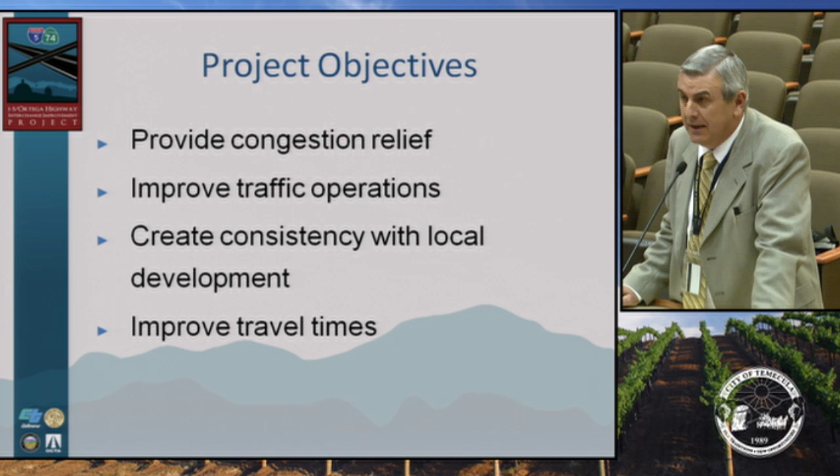The project objectives are congestion relief and traffic operations improvement. We're doing a lot of context-sensitive design. I know that you're very sensitive to those issues in this city, as you can tell by looking at your wonderful city complex. So that's part of our bridge design, to make sure we incorporate that so it fits well within the city, and to improve travel times.

The project funding is as you see, a total of $86 million from various sources.

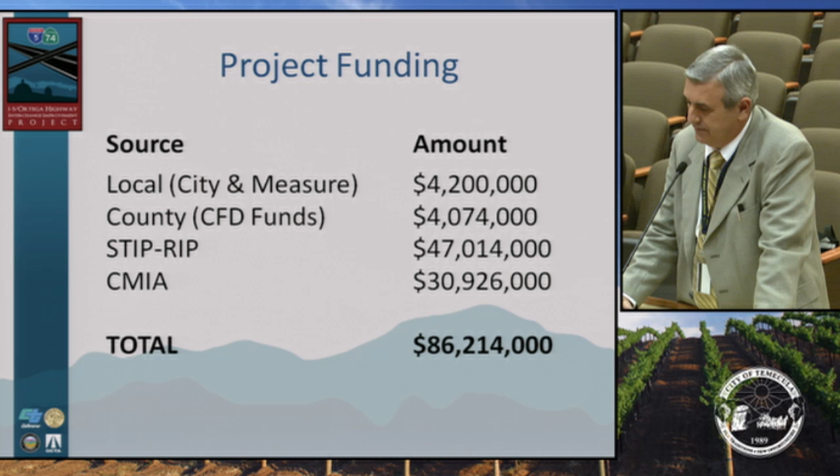Here's the construction schedule. We advertised June 4th, 2012. We opened the bid August 2nd. Obviously a project of this size has a little bit of vetting for the contractor to make sure they can perform the contract, so construction actually started on the 19th. The 15th was a 3-day presidential weekend, so the first day of construction was midnight of the following Monday. The project completion will be in 2015, and the plant establishment period is basically a warranty for plants, to make sure the plants take when they're planted and thrive well. But there's no construction going on during that establishment period.

This is the current interchange as it exists today. There are some issues with the interchange that cause traffic to back up into town. The biggest one being that if you're coming out of downtown San Juan Capistrano and want to go north, you have to make a left turn at the light on the bridge, which stops all the westbound 74 traffic. So there are signalization issues that result from that kind of back-up traffic into town.

The other issue is that with the increase in traffic, we have a lot of cars exiting at the 74, and the amount of traffic load means we're storing cars on the freeway. So you have cars backed up while cars still on the main line are doing full speed, passing cars that are essentially stopped right next to them in the lane. So for safety issues and operational improvements, we do need to rebuild the entire interchange.

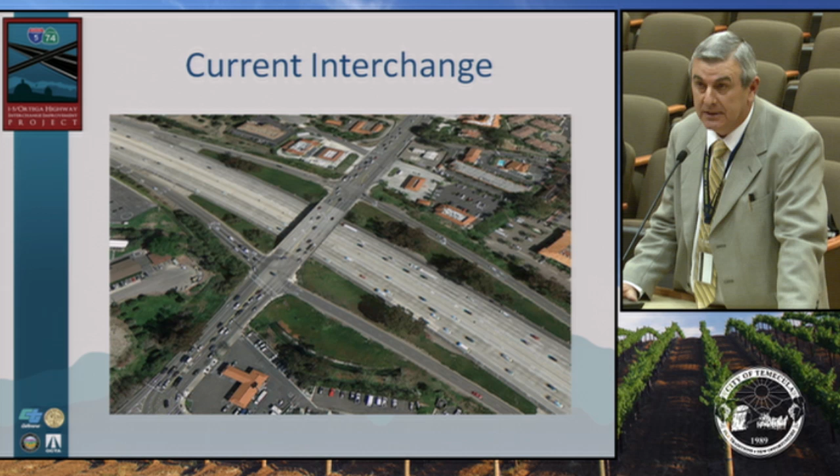So this is the project scope. We're going to be widening the southbound off-ramp at the terminus of the bridge to provide more car storage, and we're providing an aux lane on the southbound that will help solve some of that car storage problem on the main line.

We're going to totally change the alignment of the west side of the bridge. Rather than it go down to the Mission, it's going to turn and curve into Del Obispo Street. There was a significant amount of right-of-way acquisition required to accommodate that.

Out of all the build alternatives for this bridge, the city worked with us extensively during this process, because this project actually started in 2000. The original PSR was in 2000, and the build alternatives came out in 2009. Out of the 3 final vetted possibilities, the city chose this one. As a result, for those of you familiar with the area, the Jack in the Box was acquired, both Chevrons were acquired, the Arby's was acquired, and the Union 76 is also gone.

In addition, the biggest operational improvement will be on the east side of the bridge—you can see that loop on-ramp. Now, instead of having to do left turns on top of the bridge and stop westbound traffic, drivers will be able to do a nonstop right turn into the loop on-ramp, and that ramp has enough storage to carry the platoon of cars that comes off the bridge when the signals change. So when the ramp metering is enabled, we should not have a situation where cars back up on the bridge and stop that westbound traffic.

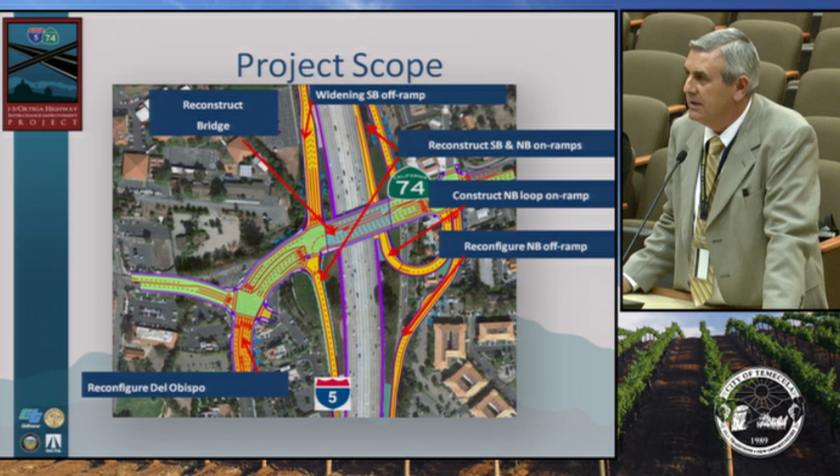Additionally, the northbound off-ramp is being rebuilt with the same kind of scenario—additional storage—so it should stop that northbound storage of cars onto the mainline freeway at rush hour.

We will have nighttime intermittent closures. Most of the work on this project is happening at night. There will be some closures during the daytime, but the intermittent nighttime closures will be from midnight to 5 a.m. during the week, and midnight to 7 a.m. on the weekends. We're giving a little more time on the weekends. Essentially, at one point or another, every one of the on and off ramps surrounding the bridge will have closures.

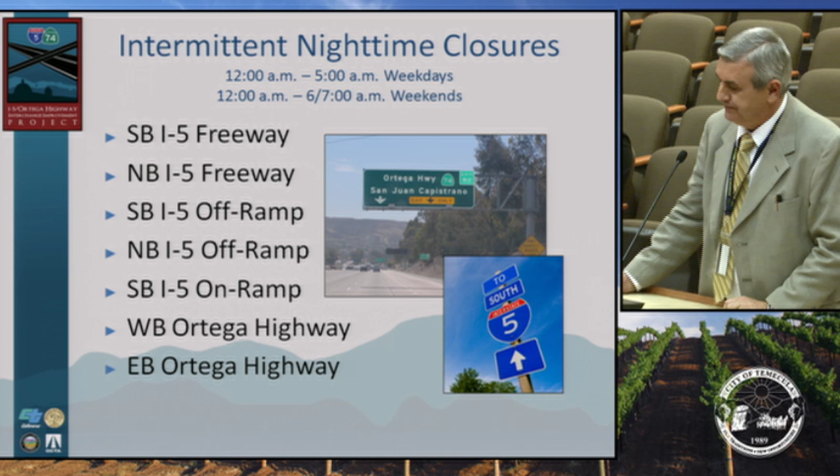Unfortunately, in South County, it's not like North County where we have a lot of surface arterials to work with. In downtown San Juan Capistrano, we really only have two streets that we can use to detour traffic: Camino Capistrano and Junipero Serra.

As the Public Works folks know, when we detour cars off of the freeway, it's not a simple process. It's an engineered traffic management plan designed by transportation engineers, and we're actually making a bargain with the public that if my Aunt Martha comes out from Minnesota in the middle of the winter, and she's got a sign that takes her off the freeway, there's a dedicated, thoughtful path that will get her safely back onto the freeway. These suggested detours are just for that.

Local citizens are very familiar with downtown San Juan Capistrano. Three days into the project, they're probably going to figure out what works best for them. But we do have to have engineered detours as part of our transportation management plan, so we do have them, and these are the streets that are the suggested detours.

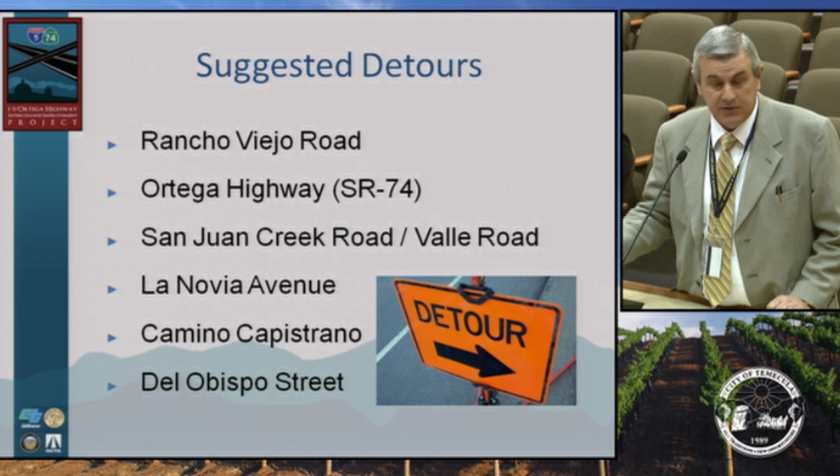Now, we are going to have some long-term closures. One reason is we are making the bridge slightly longer, in preparation for potential future widening of I-5. It makes no sense for us to build a bridge that has to be replaced because 20 years down the road we want to add lanes. Because of the extra length of the bridge, we need more camber to get the minimum heights and support the loads. So the new bridge will be about 4.5 feet taller than the existing bridge.

That brings some issues in that we've got dirt work that has to occur on both sides. Because of that earthwork, there's going to be some full closures, because you can't literally have pedestrians and cars going through a construction zone with bulldozers and earth movers working.

As part of that, we're going to have a northbound off-ramp closure for 3 weeks. We'll go through some staging slides, and I'll show you how we've managed to make it as short a period as possible. We'll have a southbound ramp closure for 6 weeks. On the west side of the bridge between I-5 and Del Obispo, 3 weeks - that's primarily to accommodate the earthwork. And between Del Obispo and El Camino Real, another 4 weeks.

We will have some truck restrictions. As part of this project, we're going to keep the bridge open the whole way through. How we're going to accommodate that is we'll saw cut the bridge longitudinally down the middle and put all the traffic on one half of the bridge. It'll have the same number of lanes, just slightly narrower. We're going to demolish the south half, put in false work, build the new half of the bridge, then reverse that process, put the traffic on the new half, and rebuild the north half.

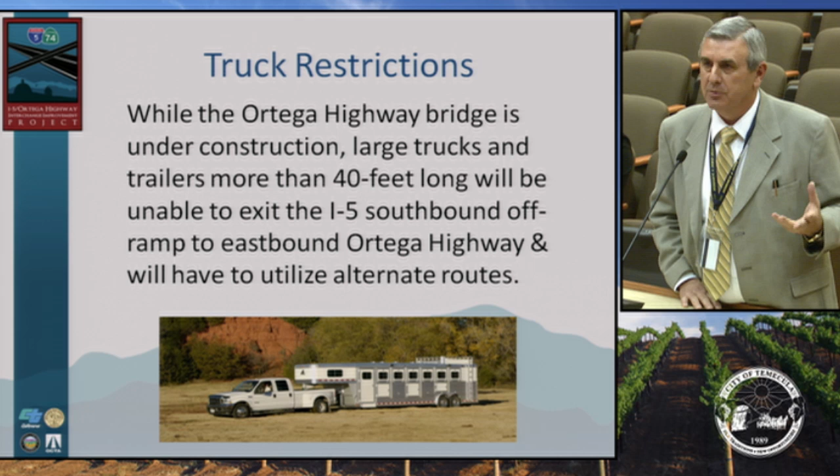So this is stage 1A. As you can see, there's a lot of work down on the main line, mostly striping, setting of K-rail so they can do work behind it. There's some bridge abutment work they need to do preliminarily before they demolish the bridge. And the south half of the bridge, where they've saw cut it down the middle, will be demolished.

This will be the layout of the bridge, the lane layout, with the south half demolished and all traffic put on the north half. You can still go straight through, but there's no dedicated straight-through lanes. So for people going to downtown San Juan Capistrano, very quickly they'll figure out this may be a bottleneck, and it's time to start looking at other alternatives, whether that's La Novia. We'll go into the detours.

There are a couple slides that actually delineate the detours for you. But this is the configuration while we're constructing the south half of the bridge.

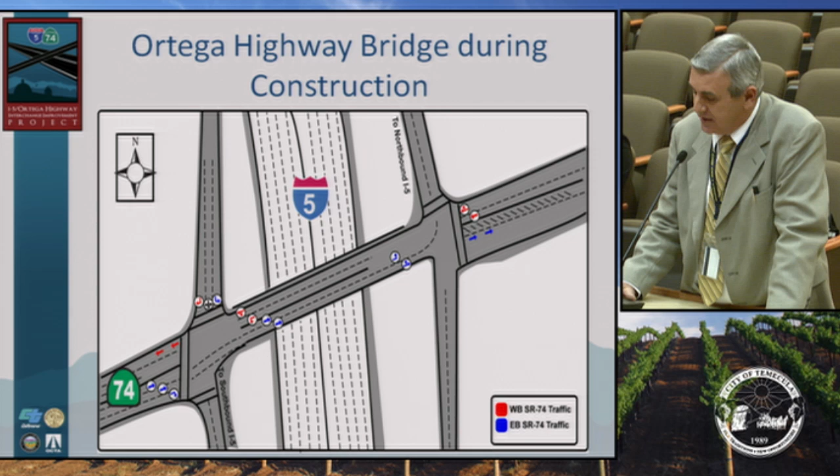Stage 1B, if you look on the right-hand side, we still have to leave the current off-ramp, northbound off-ramp, operational. But what we're doing is building all the other parts of the loop on-ramp and off-ramp so that when we finally close this section down, we can make the connection, and we've reduced the amount of time it takes to facilitate that construction process.

And also you can see the blue, that's where the false work and the construction for the south half is.

So these are the closures. Northbound I-5 off-ramp: this will be a 3-week closure, and the recommended route is to get off at Valle Road to San Juan Creek Road, underneath the bridge to Camino Capistrano, up to the bridge, and then back on northbound. Or you can take San Juan Creek Road up to Rancho Viejo Road and get on in that direction.

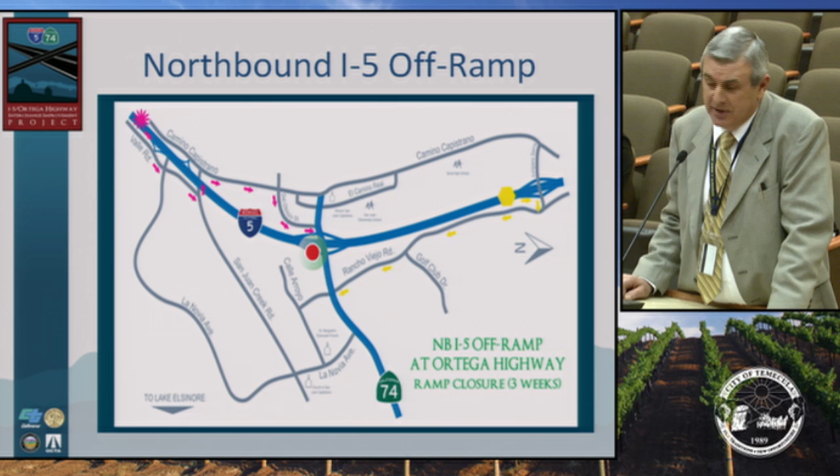So stage 1E, now they've closed the existing northbound off-ramp. They've built the section that connects the two pieces completed in the earlier stage. They've completed the lower half of the new northbound off-ramp, so cars can now use this new part of the facility. And even though the southbound off-ramp is open, they're starting that dirt fill, kind of like the bridge staging.

Once they get that completed, they're going to flip traffic over onto that off-ramp on the higher part, because remember, this bridge is now 4.5 feet taller. So if you were south on the 5 and getting off there, you'd be driving next to kind of a berm. Eventually we'll put lanes on top of that, then fill the part we just took traffic off of to get that completed.

So southbound off-ramp, or on-ramp, if we have nighttime closures: if you're on the bridge and want to go southbound, you'd take Camino Capistrano to San Juan Creek Road and then on there. Or if you're coming from this side of the mountain on the 74, you could take La Novia Avenue, turn left, get to San Juan Creek Road, to Camino Capistrano.

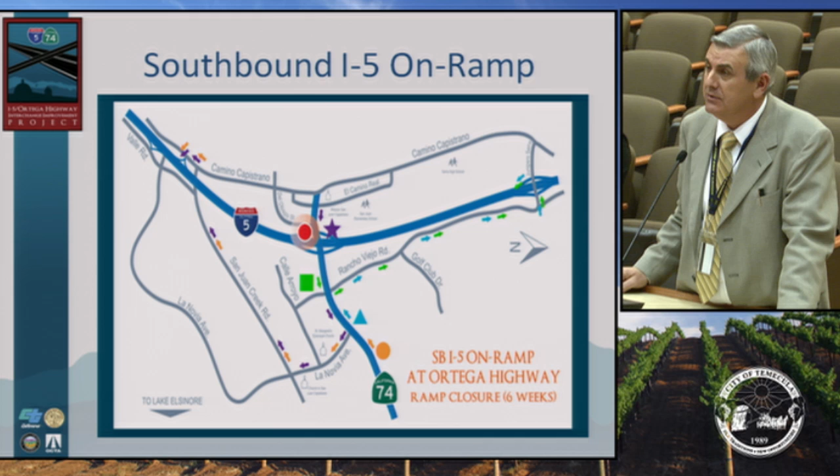And these are fairly short detours. Remember, most of this work's happening at night. So if you had real early commuters that hit the bridge before 5 a.m., they'd see some detours. But if you're there at 5, most of these are going to be open, except for small full closure windows. The other option is to go to Rancho Viejo Road, hang a right, then go up to Junipero Serra and get on the freeway there.

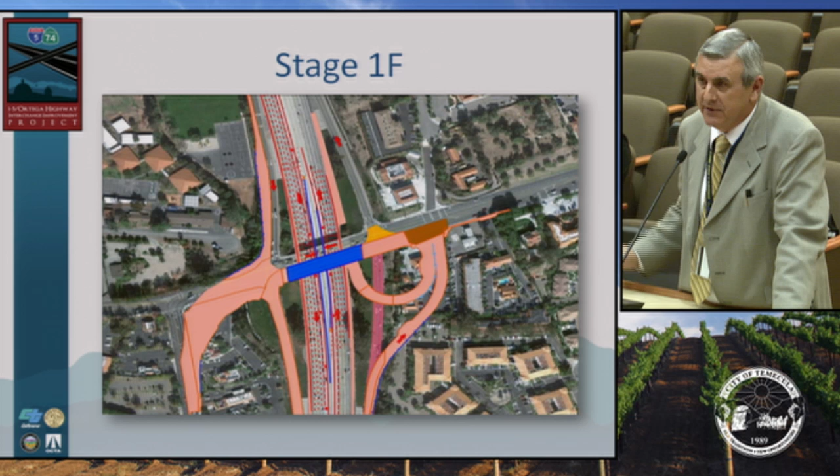Stage 1F, we're starting that dirt work into the new realignment into Del Obispo, into downtown San Juan Capistrano. Remember, it's tapering from that new 4.5-foot taller elevation into the existing surface street elevation. As part of that, because they've got trucks working in that area, there's going to be ramp closures there to Del Obispo, and these are the detours.

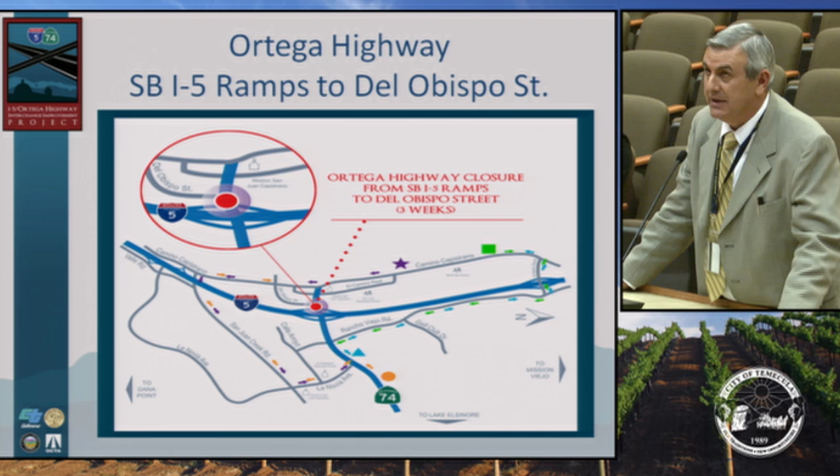There is some reconstruction, realignment, and utility relocation. There's gas lines going through the bridge, and some water lines on the east side, so we're working with the utility companies to get that done. There will be a full closure of Highway 74 just to the west of the bridge for 3 weeks.

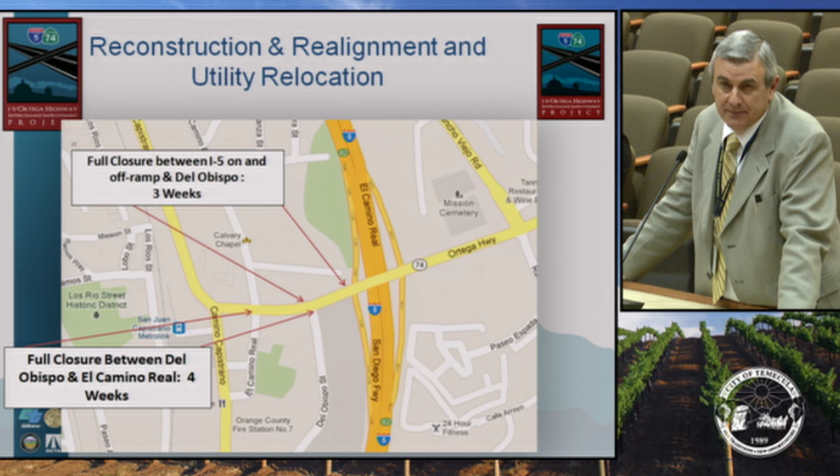That's part of the earthwork to get the earth built up, and then an additional 4 weeks where we realign that street, El Camino Real, into Del Obispo from its current configuration.

In this stage, you can see the south half of the bridge is complete, and we put the traffic on the south half while we demolish the north half. It's basically the same process, just flipped.

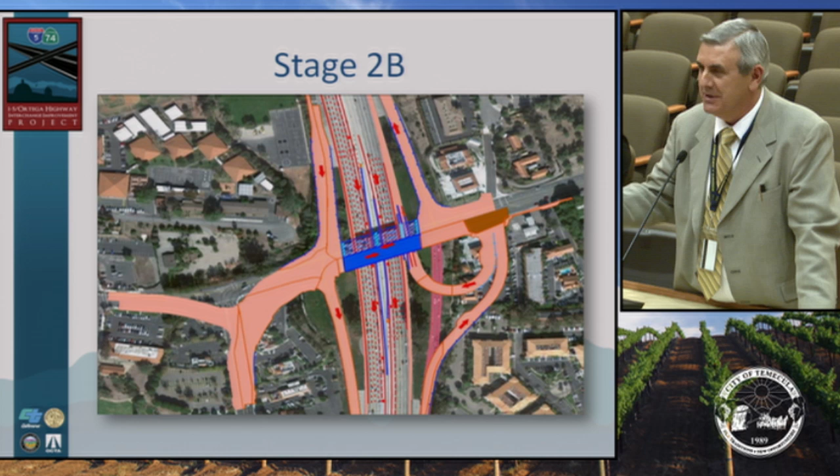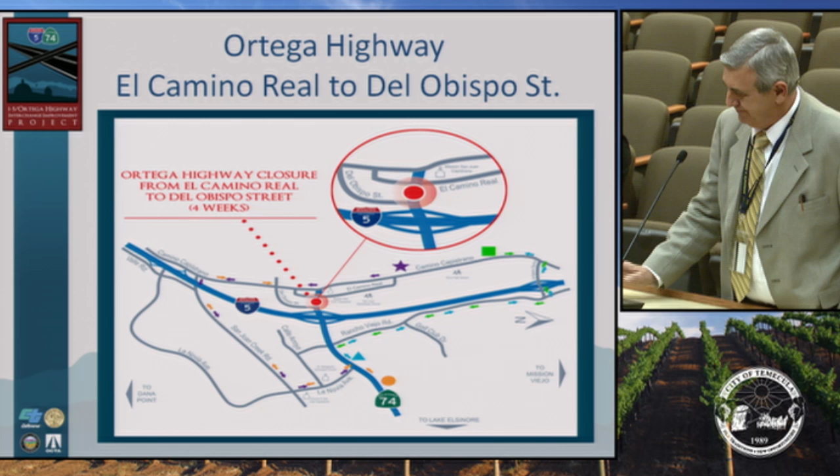El Camino Real to Del Obispo Street will have a full closure for 4 weeks, and then the construction is complete.

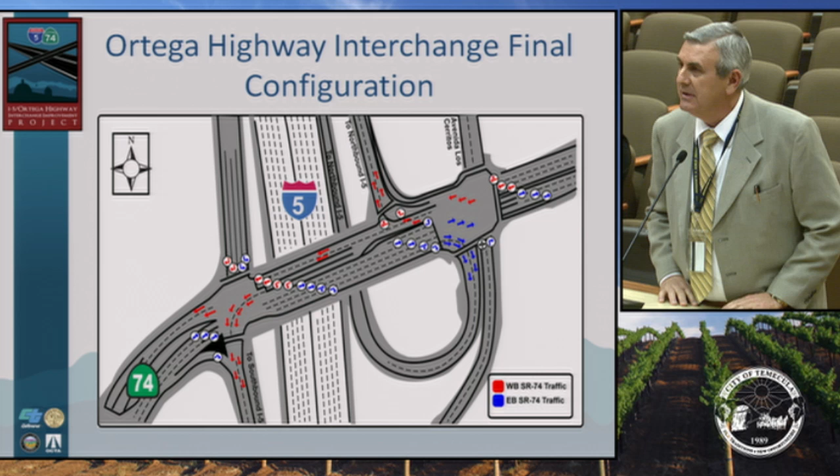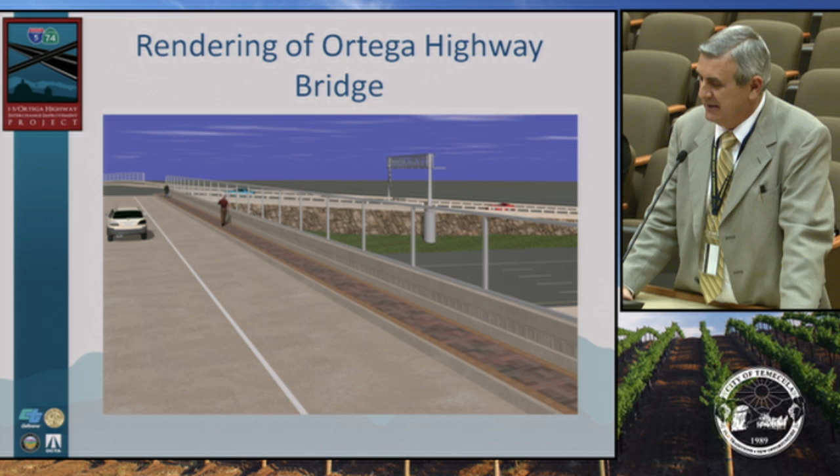As part of every project, it's a requirement that we produce a traffic management plan. That plan consists of public outreach, motorist information, construction strategies, and contingency plans. We have incident management, and our Transportation Management Center in Orange County is constantly keeping eyes on this project. We also have an enhanced enforcement program, so if you get a ticket in a construction zone, it's going to cost you a lot of money. All of those are part of the traffic management plan.

As far as outreach, we have always planned on having outreach into the Elsinore Valley. It was simply a matter of timing. The amount of issues this is going to create for the city of San Juan Capistrano just meant we had to go there first.

We have schools trying to figure out how to get their students to school on time, since during the closures and construction we're going to be putting traffic on city streets downtown. So our public outreach started very early in San Juan Capistrano with the school board, the districts, and fire and life safety, trying to get all those issues planned out early.

The amount of trouble it's going to cause commuters from the Elsinore Valley side is really pretty minimal. The detours are right at the bridge, and there's a couple of detours you can take within a quarter mile of the bridge. The 74 will be open the entire time; there will never be closures.

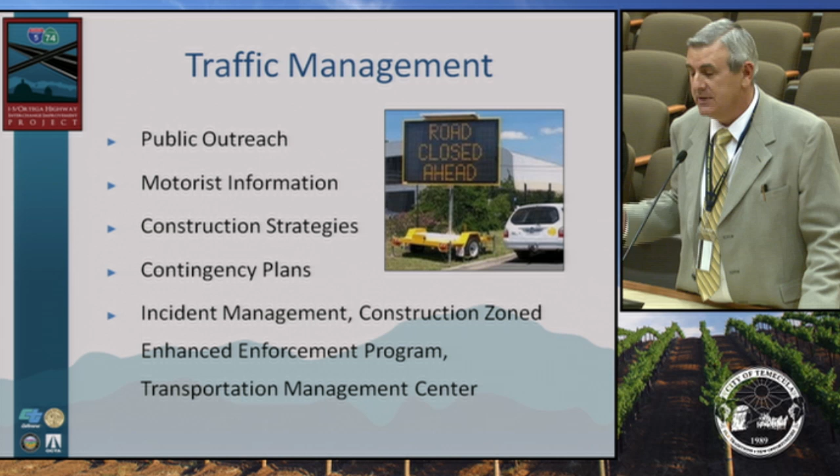As part of our public outreach, we have a consultant, a dedicated community liaison - Caltrop Corporation is doing that for us. We're being very proactive. We've had 20 or 30 meetings with the Restaurant Council, Working Stakeholders Group, Fire and Life Safety, Chamber of Commerce. I have a Wednesday night meeting every week with city leaders in San Juan Capistrano, and we're dedicated to having a 100% response rate. So if somebody calls me or sends an email or has a question about this project, they will get a response.

So we do a lot of outreach to the key stakeholders. We have social media, Twitter and Facebook. We have a dedicated web page for this project with links to Google Maps, with content updated whenever something occurs on the project that we need to inform citizens about. Traditional media, we're at community events, we've walked the city with flyers, we do weekly construction alerts. Our highway advisory radio will be activated if there are any issues down in downtown San Juan Capistrano. So we're being very proactive about our outreach.

Our dedicated website is ortega.dot.ca.gov. If you go to that website, you'll see a construction updates link on it. You can also sign up on our database, which will put you on our email blast list, and whenever any activity occurs on the bridge that requires notification to the citizens, it will be blasted out to everybody - quite a few people have signed up already. We have a Facebook, so like us even if you don't like us - that way you get the updates, and follow us on Twitter.

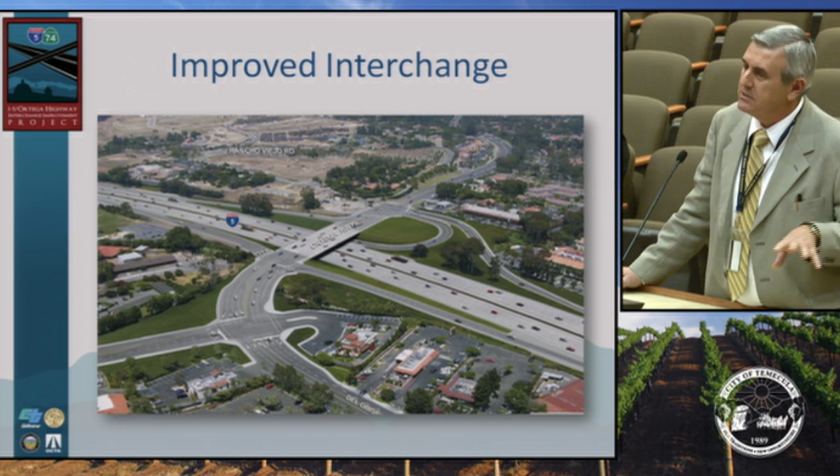There's never going to be any 74 closures as part of this project. I mean, Ortega Highway is its own animal in itself - there might be a rock slide or something that would cause a closure, but there's not going to be any full closures of 74 as a result of this project.